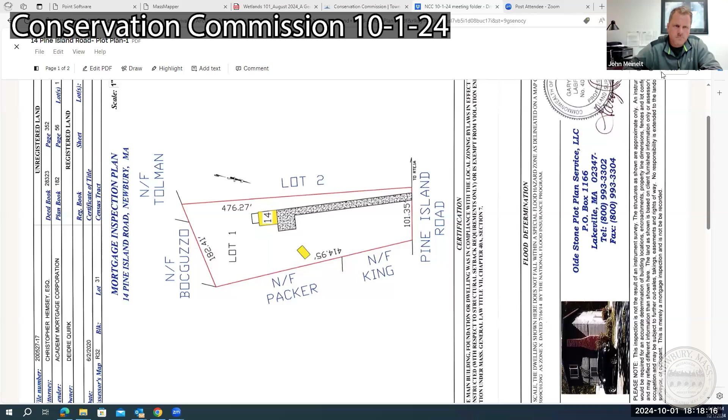This is the plot plan. Okay, so this doesn't show where the work is in relation to any wetland, so I am...

I think maybe Mason, if you show the Mass GIS of that lot, if you can grab that.

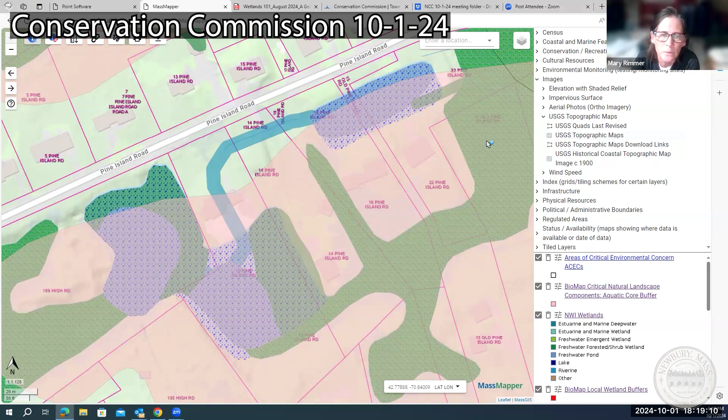So here we have the lot, this is the existing house right here, and then the proposed mudroom and garage would be going in right here. Okay, it's hard to tell from this image. Can you put it on the aerial view? Yeah, there we go.

We lost the wetland overlay, but that's okay. So it seems like there's wetlands on both sides of the house, at least according to the DEP overlay. I'm familiar with this property, I used to live across the street, and I know Mick is a neighbor as well.

So, can you measure what the distance is from where the proposed addition is closest to the pond side? Okay, so more than 50 feet probably.

And then can you add the wetland overlay on this image? I don't know if I can do it over the aerial. You can see the layers at the top right, right there, you can do it right there. Yep, and then if you go down to physical resources, scroll down on the menu to the right, physical resources right there, and then go down to hydrography.

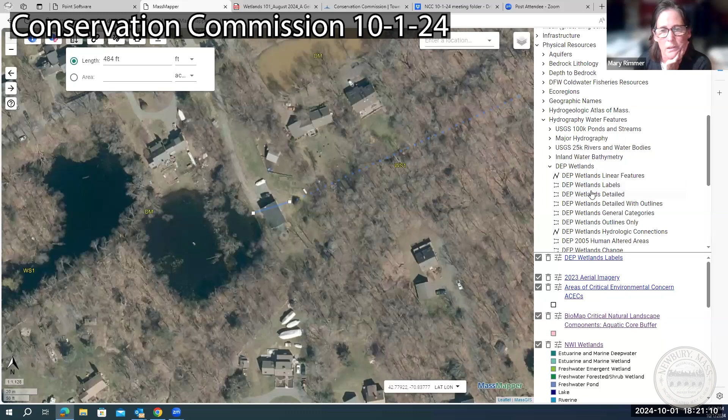Not hydrogeology, but hydrography, the next one down. And then it should say DEP wetlands down below, right there, just pick one of those. I can't see the whole screen, so... I'm not sure why it's not - there, yeah, it's showing up just in light yellow, so you can see there's wetlands on both sides of the house. Yep, exactly.

So from that wetland line, on the right side there of the house - closer to the house, yeah, there's a closer one, there's a closer line, see the other line? They're right there. So it's maybe 40 feet or so from the wetland edge. Okay.

And what are the dimensions of the structure? A 26 by 28 garage and a 9 by 11 mudroom. So the mudroom would come off the existing dwelling, and then there'd be an access door to the car garage, which is 26 by 28 deep.

So my sense is that we need a little more information on this to be able to tell whether we've got an adequate distance between the wetland edge and the work area and where to put erosion controls. Some of the work may be exempt because it's going to be more than 50 feet away, but I don't think that the garage addition is that's the case.

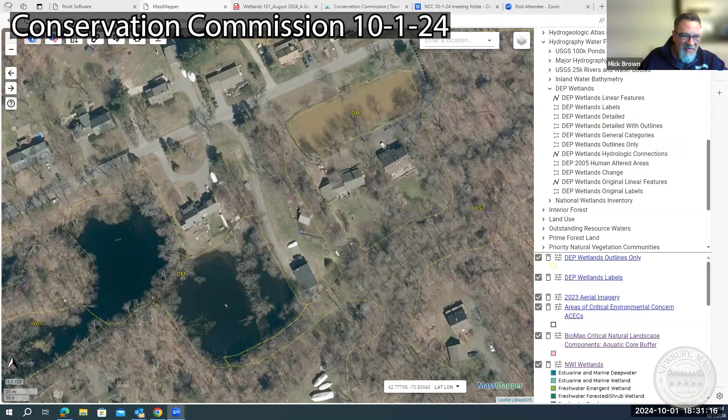Okay, the next matter on the agenda is enforcement orders. The first enforcement order is to Old Point Road, Sunset Club, for unpermitted work.

I think we're going to be tabling that for discussion tonight. The notice of intent is on the agenda further down, which may be continued.

The next item is 105 Northern Boulevard for unpermitted work. I believe we're tabling that one as well. Mason, is that correct? Yep, we're waiting for some plantings.

That's correct? Go ahead. I went by there, and they actually planted. Oh good. I don't know, it looks great, but maybe they're waiting a while to see if it takes root, but there's seagrass everywhere. Okay, great, so there's progress on that one, and hopefully the homeowner will be back in touch to try to release the enforcement order.

We have an expired order for 108 Main Street subdivision for unpermitted work. Can you give us an update on that, Mason? I believe this is getting tabled too. They're continuing just to wait on construction and work for this one. I believe they're going to be coming back within the next meeting or two, either with a new NOI or looking to continue.

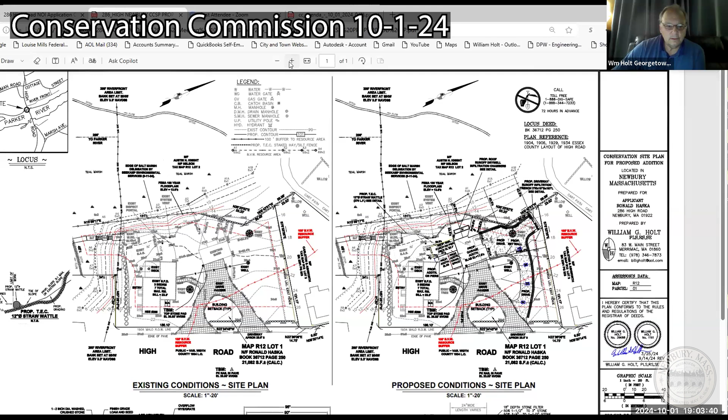I'm going to zoom in a little bit on the existing conditions. They're both on the same page, side by side, just to make it a little easier for you to see what's going on. Let me explain the existing situation. Right now, the property is 286 High Road, map R12 lot 1, currently owned by Ron Haska, who's the applicant. It's approximately a half an acre property, zoned residential, has an existing 3-bedroom home on the property, located right in this location I'm highlighting.

There's an existing driveway, a cobble driveway that comes in, turns around, and goes to an existing barn located in this area. The existing septic is right behind the existing house, in this location. It's 32 by 13, replaced in 2014 I believe - an application was before the commission back then to replace that. It's served by town water. Existing well is located in this area.

And existing tree line - let me zoom in a little bit to give it a better view. So the lot is pretty much developed. You see a hedge line on the left-hand side, on the southerly side of the property. There's an existing wood deck that has access down to Salt Marsh and goes out to a boat ramp and a boat dock that was permitted in 2014 as well. The existing tree line is right behind that deck, and it kind of follows right behind the property.

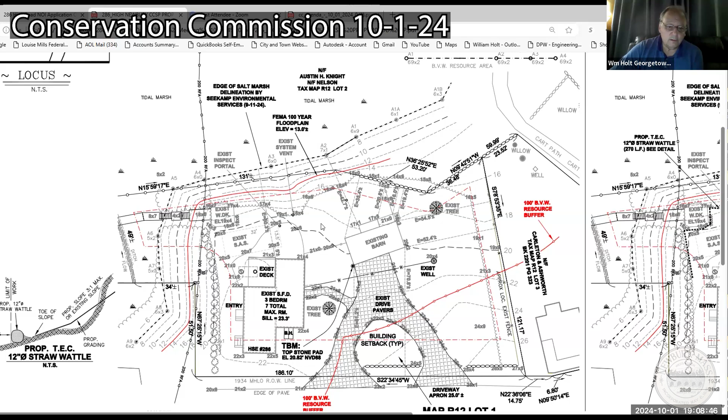Additional resource area we have is the 100-year floodplain, elevation 13, shown as this red line. It could actually be extended out, but it basically follows between those two contour lines, 12 and 14, continuing in that same direction. Again, we're not doing any work in the floodplain or in the salt marsh.

Work is all on the upper level of the property, about 7, 8, or 9 feet above the resource delineation of the salt marsh, which is elevation approximately 6 and 7, as you can see from the elevations I took at those flag locations.

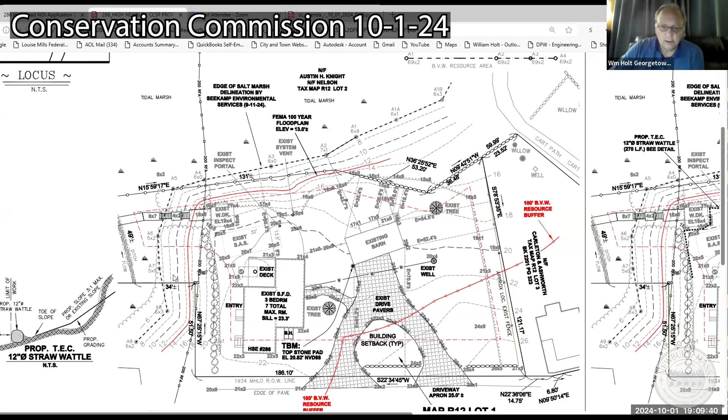Lastly, we have an ACEC, the Great Marsh, identified as elevation 10 on the 1929 datum, which is elevation 9.2 on the newer '88 datum. That falls between 8 and 9, down in this area. If I use 10 as the elevation, just because it's simple to see that line, it would follow this elevation right here. That's the limit of the ACEC, and we're not doing any work in this proposal in the ACEC area either.

So that's the existing conditions, and I'm going to slide it over to the proposed plan, and you'll see what we are proposing.

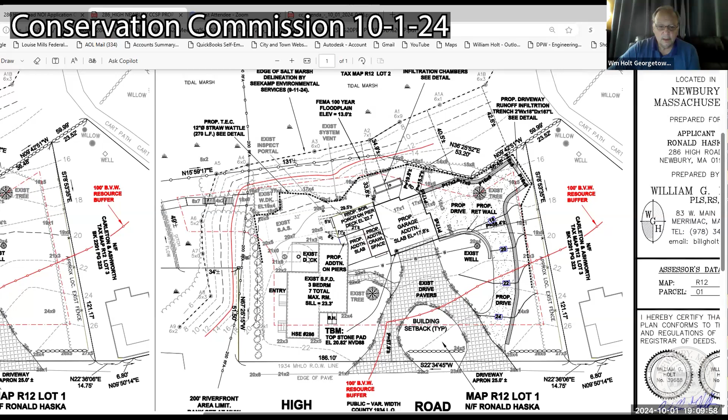Again, here's the existing house, existing deck. There's a septic tank and that's the leach area. The existing barn is in this area right now.

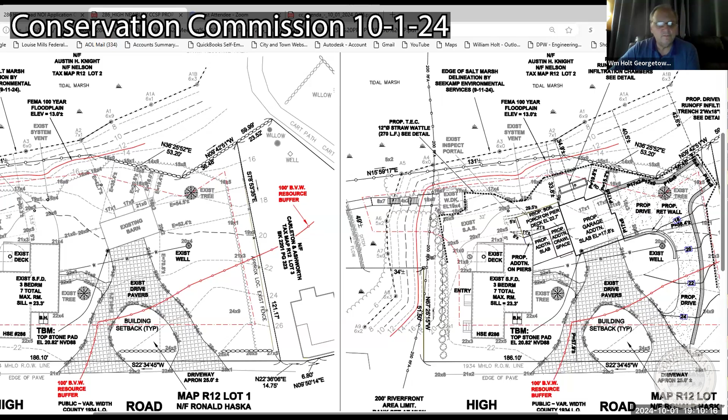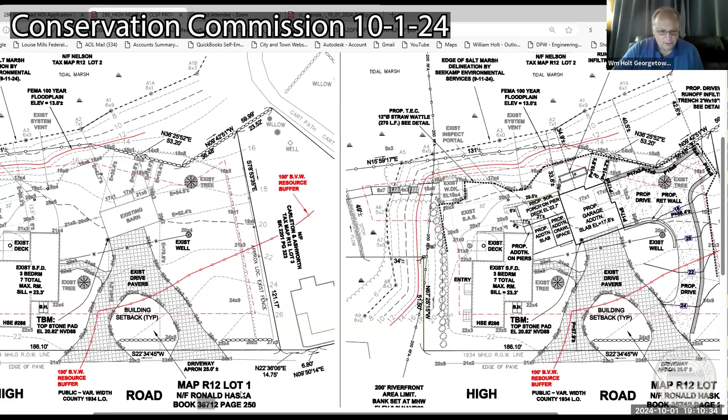The existing barn was 42.7 feet from the salt marsh, and a little closer to the property line—16 feet from the property line, which is the stone wall in the back. There's a fence along the back too; it's an old fence, with still some posts back there, but a lot less than there used to be. Back in 2014 there were more. That is the property line in the back.

So what they're proposing is to take the old building down and rebuild it on a new, larger foundation, with a proposed garage under and living space above. In addition, they'll connect between the existing house and that new garage with a proposed slab and crawl space.

The reason that's on a slab and that's on a crawl space is we have to be a certain distance from the septic system—10 feet from a slab and 20 feet from a crawl space. So they couldn't put a full foundation under those two portions of the addition.

A porch on piers in the back will also be proposed. In addition, they want a garage under on the right-hand side, with a driveway coming off the existing driveway into the garage, and a little turnaround to come back out. The impact on the property is about 5,836 square feet in the buffer zone.

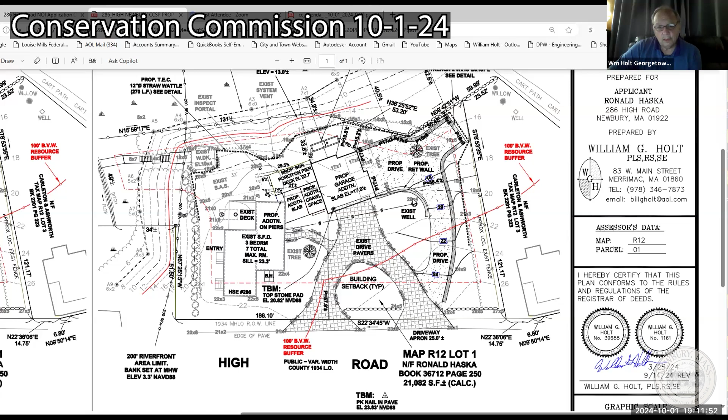The buffer zone is this red line out here, the 100-foot buffer zone. As part of the driveway, we're going to put in a small wall to keep the grade where the existing well is with its lawn.

In the back, there'll be a small area affected by the new work—a small area of vegetation, about 234 square feet I believe, right through here, where the vegetation will have to be cut back, loam stripped, and a gravel base put down for the proposed turnaround back driveway.

The new proposed addition will be 33.8 feet at its closest point to the porch, and 34.9 feet to the actual proposed garage. The house, of course, stays the same. The porch is a little further than that, but that's the closest point. To the driveway, it's 40.5 feet to the edge of the driveway here, and 42.6 feet to the edge of the driveway at that location.

Again, we're not doing any work down below, it's all going to stay up. We do have proposed hay bales, silt fence, silt sock or straw wattle to be installed prior to construction to keep erosion from going down the slope into the wetlands resource areas. We do have a mature tree here that's going to have to be removed to build the driveway, and it's a small area of vegetation there.

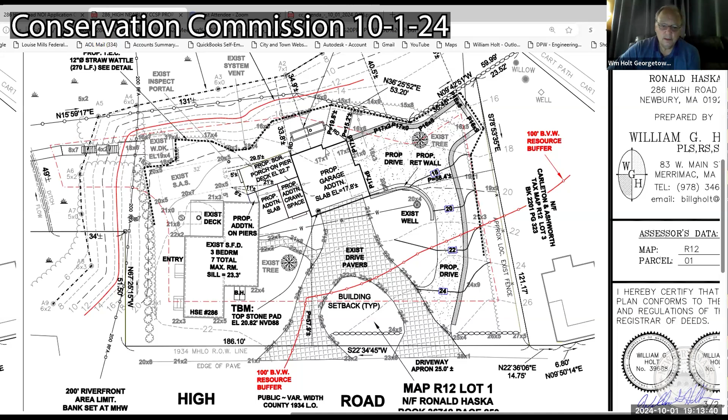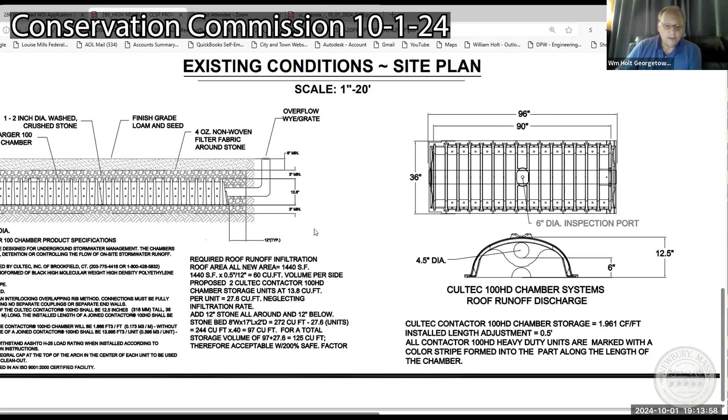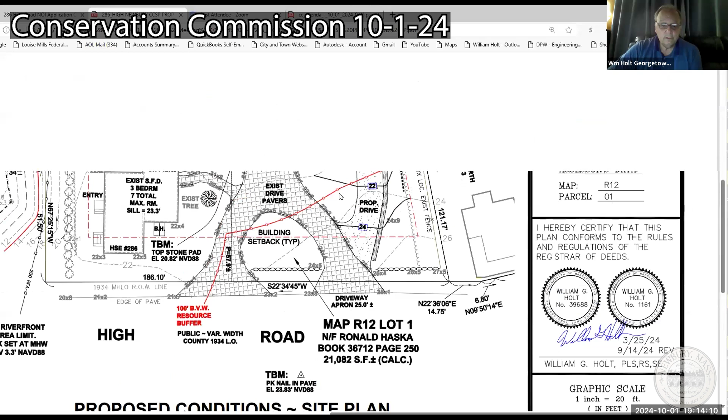Not subject to stormwater management, but we will be designing roof runoff for the proposed garage area that's being added, right behind the garage itself. We have a detail of that - it's plastic chambers in the ground where the overflow is designed, originally for a half inch of runoff, which is the first flush. It's actually over-designed by 200%, so it's designed for the first inch of runoff, which will be treated and infiltrated, with any excess flowing out as overflow if it fills up, which it probably will in a larger storm.

We also are proposing a stone trench infiltration along the edge of the driveway. I'm showing the proposed drive - it's 2,110 square feet of proposed new driveway.

I designed it as if it was paved, though it may not be paved - I'd have to refer to Matt or Ron as to what they're actually going to propose for a surface. I did design it as though it was paved for this infiltration trench, so I designed that also for the half inch, and again it's designed 200% larger than that, so it's actually designed for the 1 inch runoff. Again, that's the first flush, where most contaminants would be, and they will be infiltrated into the soil. There's no need to mitigate for the 100-year storm because it's a single lot and doesn't require that for single lot stormwater management.

So that's basically the proposal. If you have any questions, I'd be willing to try to answer them. There is no natural heritage as well - I wanted to mention that. I checked, and there's no natural heritage habitat. And I think that's it.

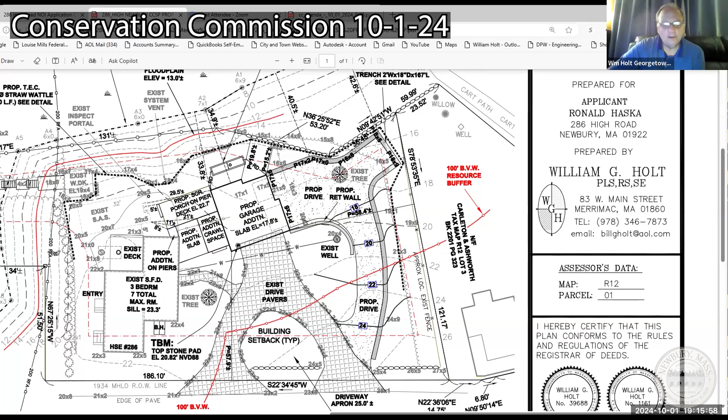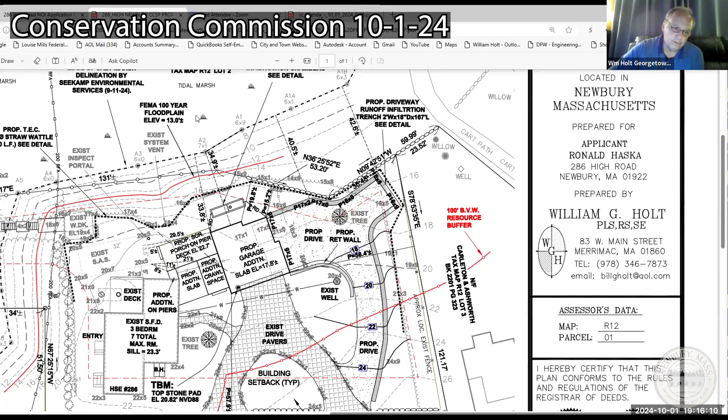I don't know if Mason got a chance to take a look at the flags. We went out back, I think it was middle of September - Patrick and I went out and replaced all the flags, so they're definitely there. They're a little hard to see, you have to look for them because there's good vegetation in the back there, but it is at the toe of slope, as you can tell. It's sloping right down, and then it's pretty flat beyond that.

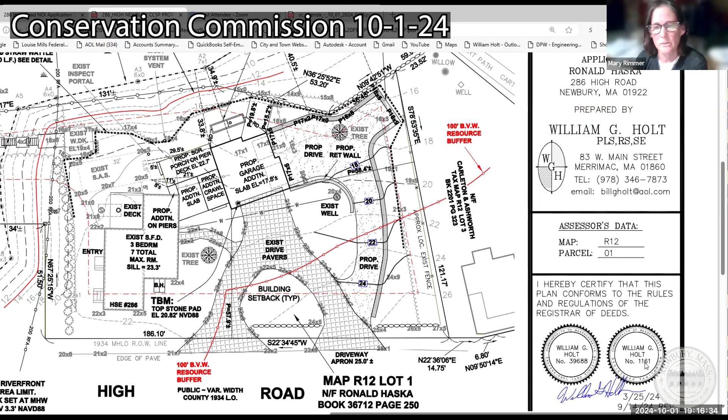Before I ask members for comment - Mason, are there any updates or other information we should be aware of with this file? Not at this time, I haven't been able to get out to the site yet. Yeah, there's a fair amount of work proposed in jurisdictional areas, so this may be one we want to have a site visit on as well.

Couple quick notes before I pass it on to the other members - if you could leave the plan up, Bill, that would be helpful. If you could calculate the total area of impact, we just need to confirm that the town's stormwater bylaw doesn't kick in, which I think is one acre of disturbance. You may be well under that, but please confirm it - doesn't have to be right now, but provide that information. Also, on the delineation, it appears there's coastal bank as well that hasn't been identified on the site, so that's something I'd be looking for.

So I'm going to turn it over to Diane. I had a question on the delineation - you're basing everything off the delineation that was done back in 2014, is that right?

No, actually, I went back out with GPS and was able to relocate the flags by survey, which we had located back in 2014. When I was relocating and resetting the flags, Patrick was present and verified the line as I was telling him this is the location where A9 is. He was looking at the vegetation and soils, and indicated that if it was the same he would put the flag back up, and if it was closer he would tell me and we would relocate it.

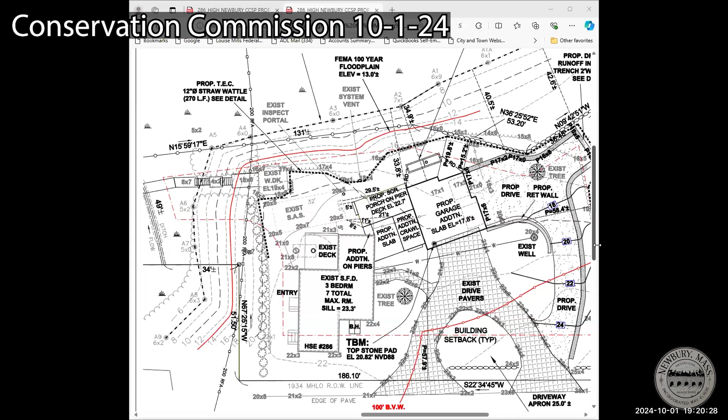Commissioner O'Brien, the delineation for all practical purposes is current. It was done maybe 2 or 3 weeks ago. I think Bill's point was that this was the original delineation from the original Notice of Intent permitting in 2014. It didn't change much, but it did change a little, which I adjusted the flags for as Bill suggested. It's actually a little higher, which happens, although it is a very distinct topographical break at the bottom of the slope. So you really come out of salt marsh directly to upland for almost the entire length of that flag line. There's a couple of areas where there might be a shad bush, arrowwood, or glossy buckthorn that could potentially be a BVW edge, but it would only be a foot to a foot and a half wide.

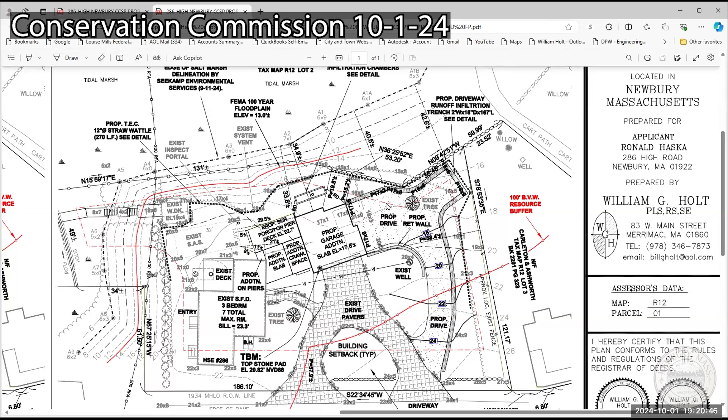Then it's mostly salt marsh right at the bottom of the slope. I heard Mary's comment about coastal bank - that's correct. This is likely going to be the 100-year flood elevation, Mary, because of how steep the slope is. As long as you use DEP policy guidance and do some transects on the plan, we can look at it.

Commissioner O'Brien, you had another question? No, that was fine. Just the narrative mentioned it was a 2014 plan, and I wanted to make sure it had been updated, which apparently it has been.

My other question, just a quick one: the existing driveway with the pavers, is that still going to be there, or is it being removed in lieu of the new driveway going in? My understanding is it's going to stay. I don't know if it's going to be shortened in this area where it could be rounded off and restored as lawn, vegetated, because the driveway - the garage is going to be on this side. Right now there's no real garage door there.

Do you mind if I speak to that? Sure, I'll let Matt speak to that. Hi, my name is Matthew Cummings from Cummings Architects. So this design is a barn design.

The intent is to have the image that somebody would be able to pull a cart straight up to it. Now that doesn't mean the materials have to be impervious - they could be pervious, or maybe a little bit more. But historically, to have a barn without a pathway to the front of it would be a little odd. I understand that might be contradictory towards limiting impervious area, and we're respectful of that. So if there needs to be some math and a play on pervious and impervious, we would look forward to that.

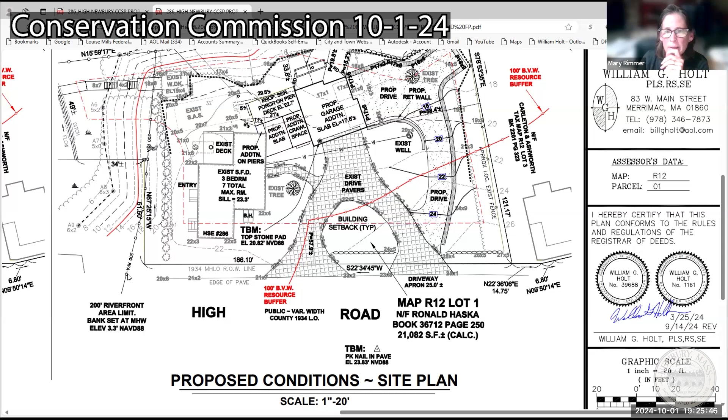Okay, and Woody, do you have any comments? I will comment, a site walk would be useful. And on the north side of the property line, where it says existing fence, I believe there's a tall row of arborvitaes or some sort of plant. They've grown quite tall, and the site walk would be helpful because I wouldn't want to impact the screening between the neighbors if the driveway affects that. I'm also interested in what the new driveway material would be, but I'll save other questions for after the site walk.

Thanks, Woody. One question before I turn it over to the public: are there any open orders of conditions on this property? Has there been a certificate of compliance issued for the 2014 order of conditions? That I don't recall, I will check and we can close that out if there is. That was for, I believe, 2014 for the dock, and then there was one for the septic, which was right before that.

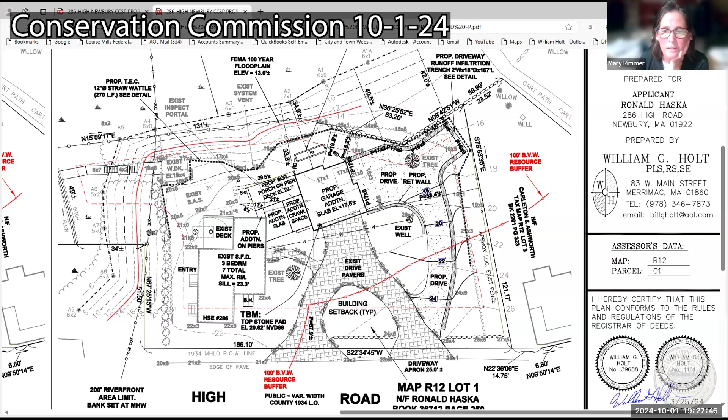So are there any members of the public that would like to comment on 286 High Road? Any hands up? Okay.

So we have a request for a site visit, and not wanting to burden everyone on their Saturday mornings by loading up on site visits, does anybody have suggestions for when they'd like to take a look at this? Do we only have the one? Are we not doing, did you say Mason's doing the 68 Green Street ones? Well, anybody who would want to, we could do it then as well. I didn't know if we'd schedule it in particular. No, I was just thinking if we weren't doing Green Street, it might not hurt to go right over after, like a 9:45.

I'm not available this weekend, I'm going to Maine, so I won't be around. Yeah, I think it would be helpful to have it staked out too, Bill. Okay, yeah, so since I'm going away, I probably won't be able to stake it out until sometime next week.

Do you want to try to set something up for the week of October 7th? That's not this weekend, right? That's the following weekend, so that should be fine. We usually do Tuesday mornings, so October 8th. What time? Maybe 9:30ish, or we could do 8:30 and meet, do the other one at 9, or how about 8 o'clock on the 8th? Let's do 8 on the 8th.